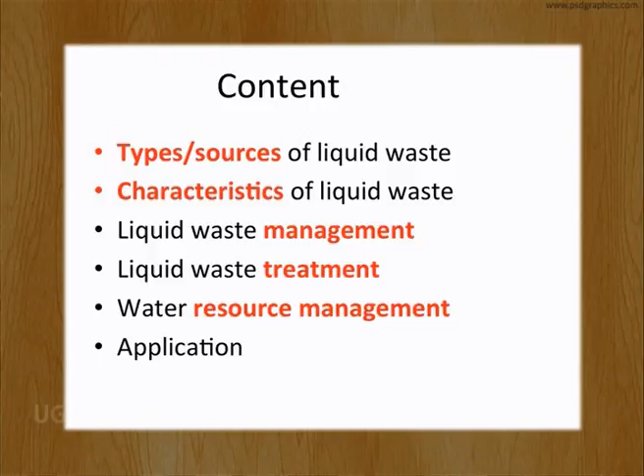Hello students, today we will discuss liquid waste management, a part of waste management, as well as the application of composting. I will talk about types and sources of liquid waste, characteristics of liquid waste management, liquid waste treatment, as well as water resource management and its application.

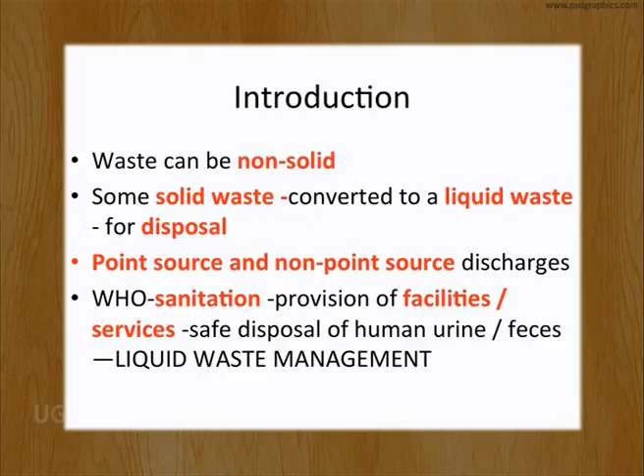Waste can be non-solid. Sometimes for disposal purposes, some solid waste can be transformed into liquid waste. The liquid waste discharge can come out from point sources as well as non-point sources. According to WHO, the World Health Organization, sanitation means provision of facilities or services for the safe disposal of human urine and feces. That is nothing but liquid waste management.

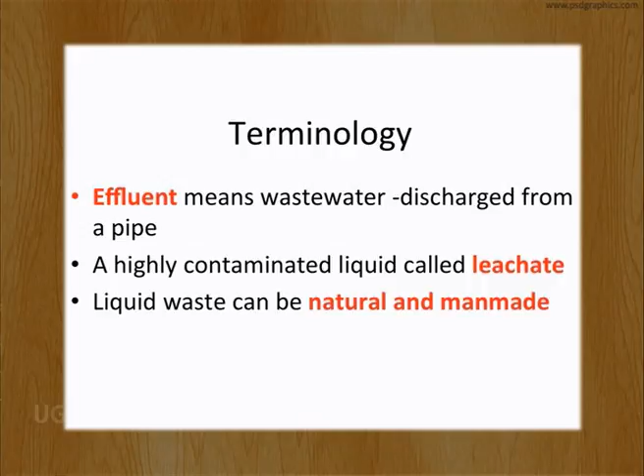Ma'am, what is point source and non-point source discharge? Point source discharge comes out from industrial effluent, and non-point source discharge comes out from agricultural runoff. The terminology 'effluent' means wastewater discharging from a pipe, and highly contaminated water is called leachate. The liquid waste can be natural or man-made.

Type, source, composition of the liquid waste. Any type of water or wastewater, if adversely affected by anthropogenic influence, is termed wastewater. Municipal wastewater is the combined sewer of storm sewer and sanitary sewer, and it is taken for treatment. After treatment, it can be discharged, and a decentralized sewer system will rely upon on-site sewage facilities.

Sewage, runoff and industrial water. Sewage can be generated from schools, institutions and households. Industrial waste can be generated from different industries. Their content and type can vary, and they may contain hazardous or toxic waste which needs special treatment.

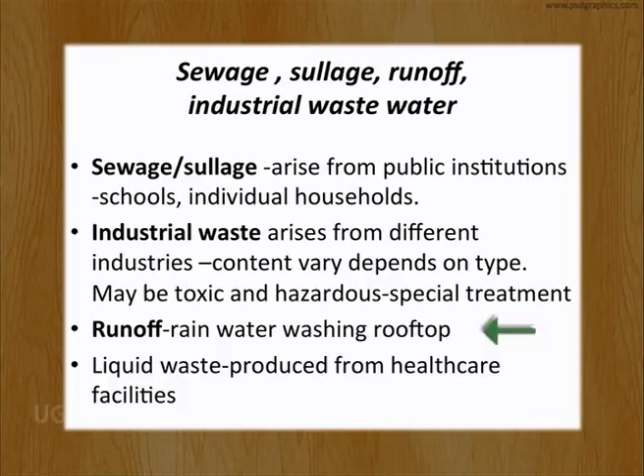Runoff can be generated from rainwater or flood. Liquid waste can also be generated from healthcare facilities. Sewage is nothing but contaminated water with human feces and urine, which is termed black water.

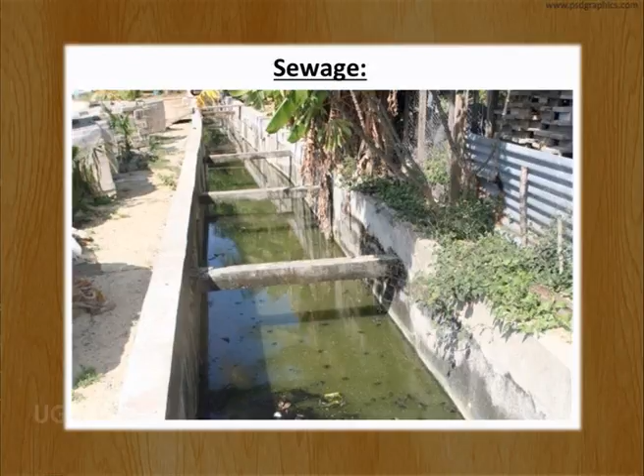This sewage includes domestic, municipal and industrial wastewater. Now, what is sewerage? It is the physical infrastructure including pipes, pumps, screens, channels, etc., which convey the sewage from households, making the sewerage network, ultimately conveying it to the treatment plants or for disposal from origin to treatment.

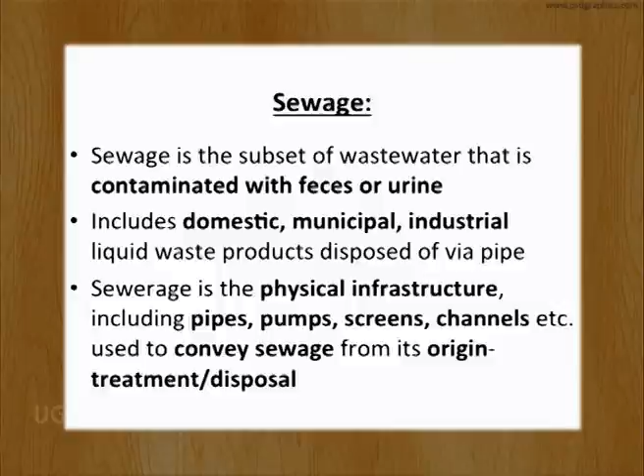Sources include human waste like urine, which is why it's called black water, septic tank discharge, discharge from the sewage treatment plant, as well as groundwater infiltration, seawater ingress, river water ingress, storm drain, highway runoff and agricultural runoff. It contains oil and natural gas, toxic contamination, extreme pH waste, as well as organic and biodegradable materials.

Composition: greater than 95% is water. It contains pathogenic bacteria, viruses, protozoa, as well as non-pathogenic bacteria. It also contains soluble and insoluble organic particles, as well as inorganic soluble and insoluble particles.

It contains gases like H2S, carbon dioxide, methane. It contains emulsion from paints as well as macrosolids. It contains toxins such as pesticides, herbicides, pharmaceuticals, hormones, as well as protozoa and other parasites.

Sullage is nothing but grey water. It is generated from personal use, so sources include the floors, clothes, as well as dishes.

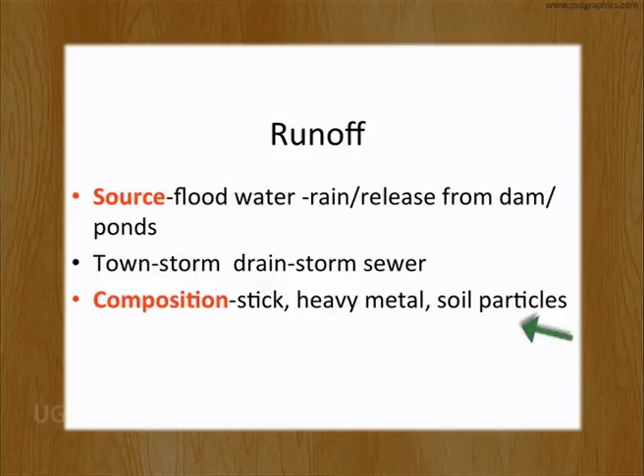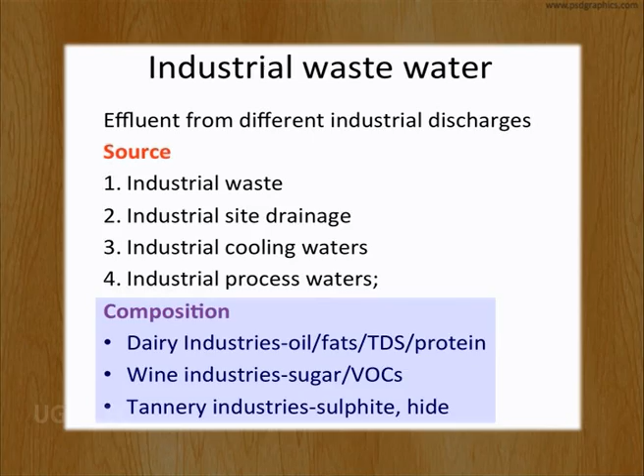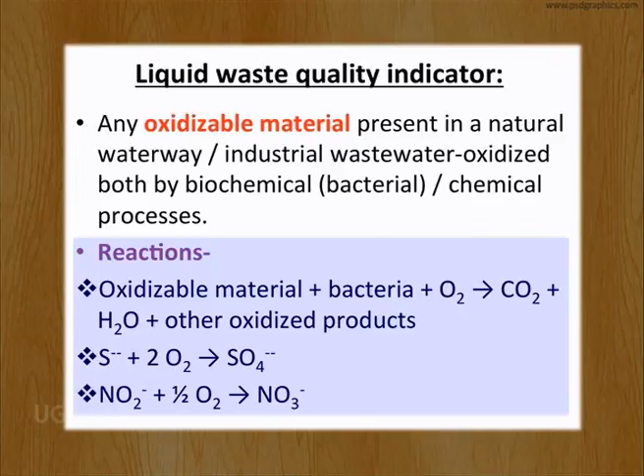Characteristics of liquid waste with respect to indicators and parameters. Liquid waste quality indicator: any oxidizable material present in water can be oxidized biochemically by bacteria as well as chemically. The reaction includes oxidizable material plus bacteria, nutrient plus oxygen, which may give rise to carbon dioxide, water, energy as well as other oxidized products. Apart from which, sulfur can be oxidized to sulfate, and nitrite can also be oxidized to nitrate.

Parameters: 5-day BOD (biological or biochemical oxygen demand), 4-hour COD (chemical oxygen demand), as well as pH, total suspended solids, ammonia, and nitrate can be taken as parameters.

Liquid waste management: I will talk about definition, significance, parameters and characterization. First, management of liquid waste is a way to dispose of the liquid waste so that it will be safe for humans and the environment.

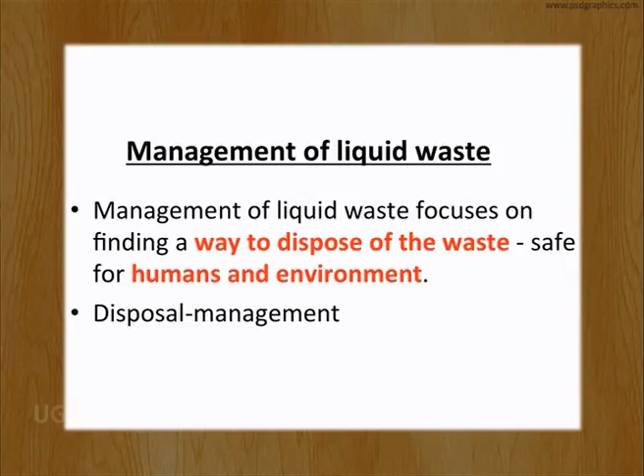So this is disposal management.

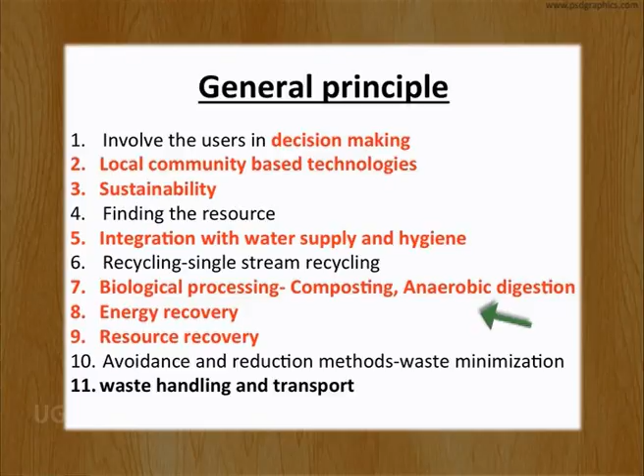General principle: there must be some principles. This involves user decision making as well as local community based technologies, sustainability, and integration of supply and hygiene. It includes energy and resource recovery, biochemical or biological techniques including aerobic and anaerobic facility, waste handling and transport, and waste minimization.

Central principle, waste hierarchy: the 3 R's - reduce, reuse and recycle - as well as the very important point of the life cycle of a product, that is manufacture and distribution of all those 3 R's. Then a very important point is resource efficiency for economic and global growth, as well as the polluter pays principle: if it creates negative impact, it must be paid by the polluter.

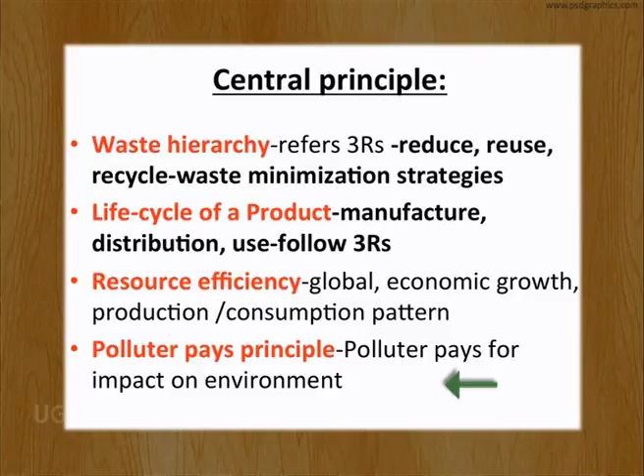Characterization of human waste management, sewage management, runoff management and industrial wastewater management.

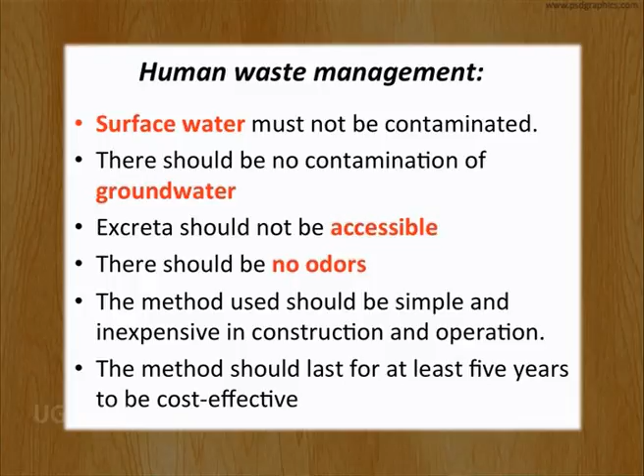First, human waste management: you have to be conscious that it must not contaminate the groundwater as well as surface water. Excreta must not be exposed or accessible, and no odor will be produced. So a particular system will be made so that construction and operation is simple, and that can last for at least 5 years, according to cost effectiveness.

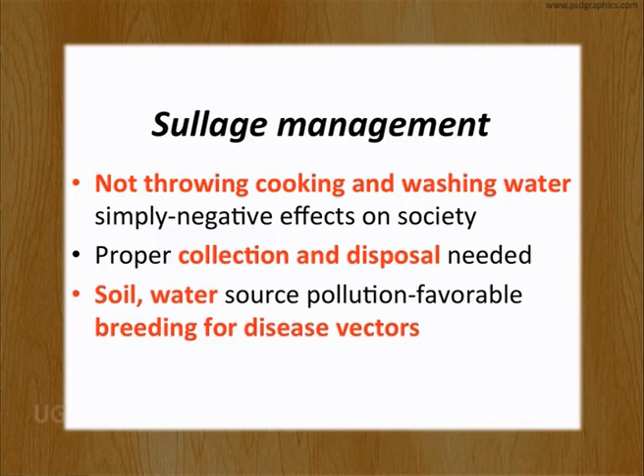Sullage management: we will not directly throw the cooking and washing water. There are many different collection and disposal techniques. Otherwise it can create soil and water contamination, as well as help breed vectors like mosquitoes, the disease vectors.

Industrial wastewater management: before release, the industrial wastewater must meet national guideline values, and for any project to run for an industry, a preliminary step must be needed according to Environment Impact Assessment, EIA. By this EIA assessment, we can predict the consequence to the environment, which may be positive or negative.

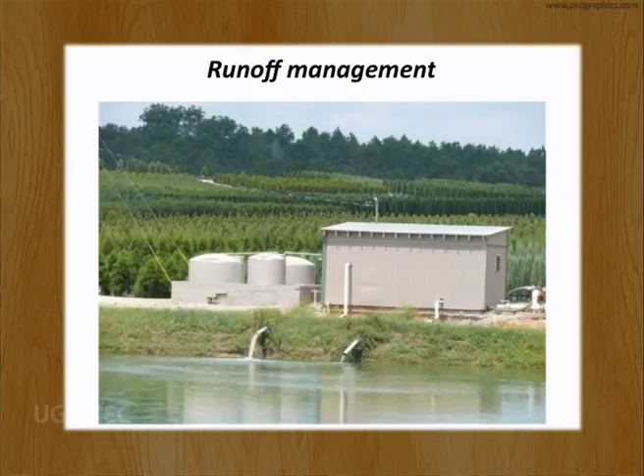Runoff management: if we cannot control the drain, storm drain etc., it can create flood, which can damage households as well as generate waterborne diseases and problems for irrigation. In towns we have storm drain canals, but in rural areas pre-planning must be needed, otherwise it can create flood, waterborne disease, and disease outbreak. So routes must be identified, with location of the routes and channelizing them.

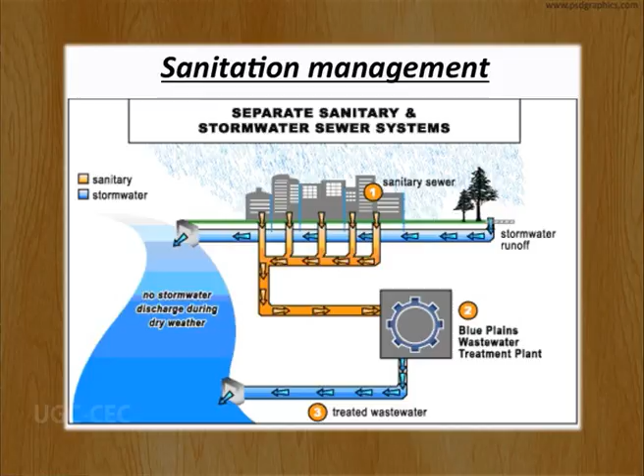Sanitation management: we have to choose proper sanitation management because there are many different techniques. Collaboration and installation of the proper sanitation system is needed.

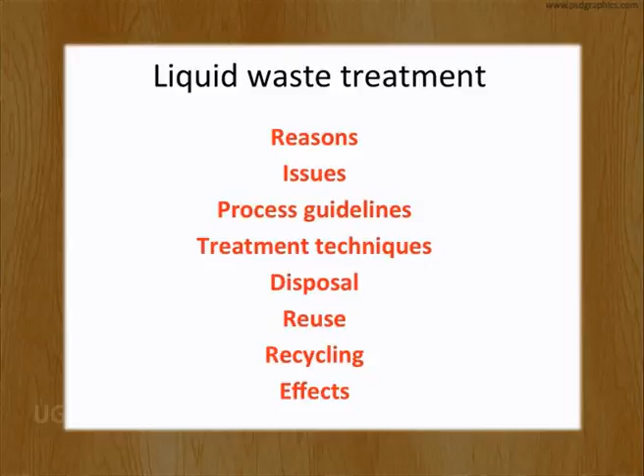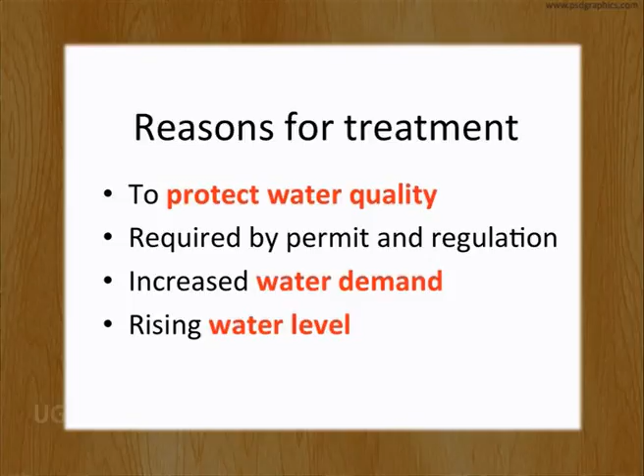Liquid waste treatment will include reasons to treat, issues, process guidelines, treatment techniques, disposal, reuse, recycling as well as effects. First, reasons: why do we need to treat them? Because to protect water quality, to rise water demand, and the increasing value of the water level. So it will need the permit and the regulation as well.

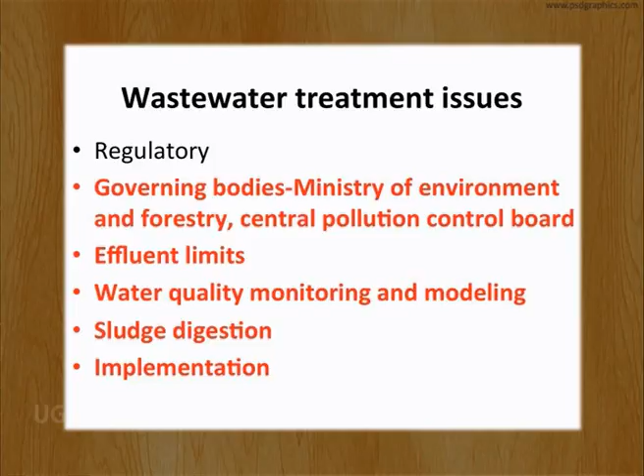Wastewater treatment issues: some regulatory governing bodies are there like Ministry of Environment and Forestry as well as Central Pollution Control Board. They will give you the water effluent limit, which will be maintained by modeling and monitoring system as well as sludge digestion implementation, which is also very much needed.

Process guideline: the treatment process and system must be simple to operate and maintain. It will be efficient and flexible as well, and may include biological, aerobic, anaerobic treatment. It will not produce any odor. After treatment, the treated sewage can be used for irrigation, and sludge can be taken as manure.

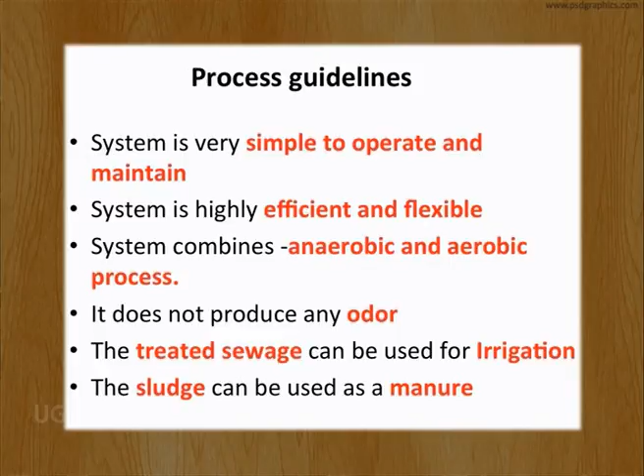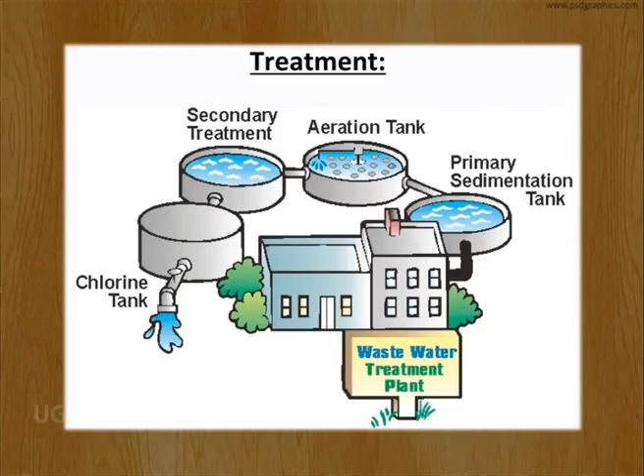Treatment: two basic approaches are there - one, to reuse the waste as a resource, as well as to resist the pollution. For industrial treatment there is the wastewater treatment plant (WWTP), as well as on-site sewage facility like septic tank (OSSF).

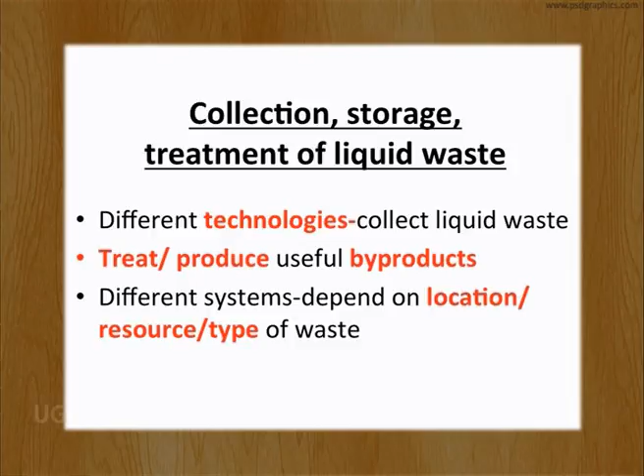First, collection, storage as well as treatment of liquid waste: there are different technologies, by which they treat and produce byproduct, which will vary according to location, resource as well as type of waste. Septic tank is actually linked to the sanitation system for partial storage and partial treatment.

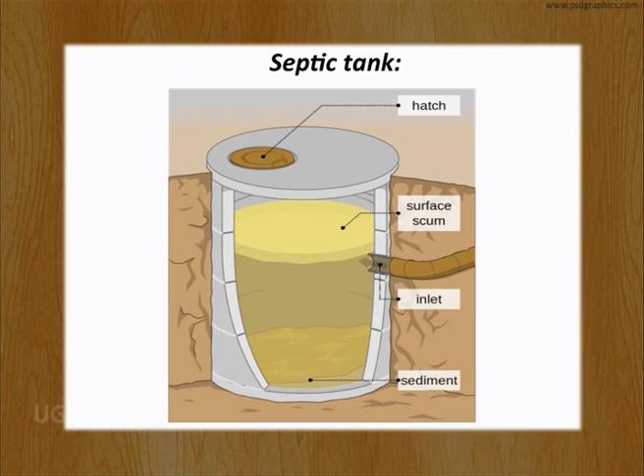Actually, we find it in case of towns as well. It is an underground system, PVC made, with inlet and outlet pipes. Retention time is 19 hours, so we can input the sanitation over there.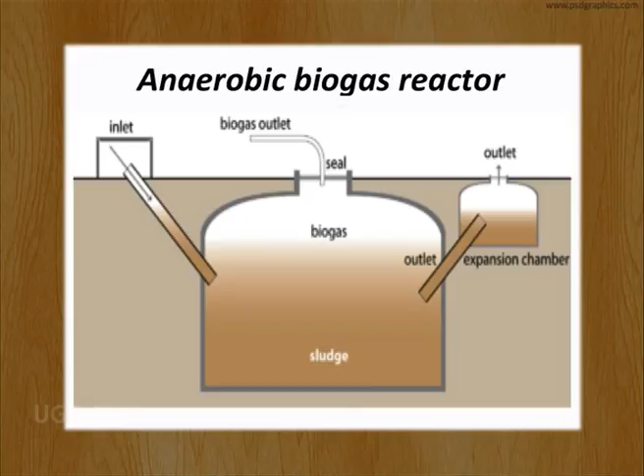It is also underground, but here we find the inlet. Human excreta is taken as input, and two outlets are there for biogas as well as sludge. Sometimes animal manure as well as vegetation can also be given as input.

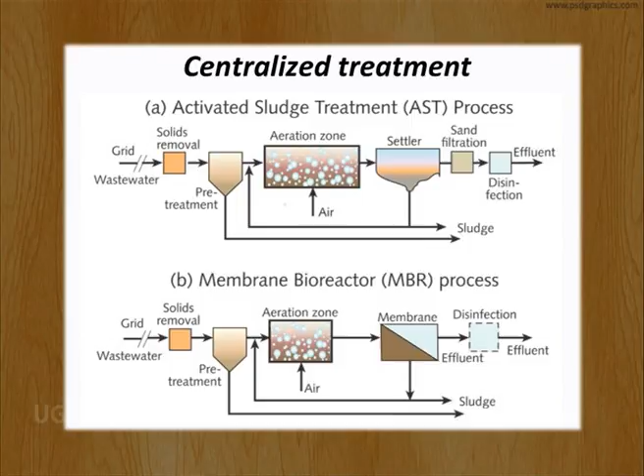Centralized treatment: in large towns and cities, the sewerage system collects the sewage and conveys it to the treatment plant. Small diameter sewers collect the sewage from different households. But in case of industrial waste, different special treatment is needed.

Pre-treatment techniques used for municipal and industrial wastewater treatment: first the preliminary physical treatment - screening, filtration as well as sedimentation. Then primary chemical treatment includes coagulation, precipitation, neutralization and oxidation.

Secondary biological treatment includes biodegradation, bioremoval, bioscrubber. Two processes are there: attached growth system and suspended growth system, either aerobic or anaerobic. Then tertiary treatment includes nitrogen removal as well as ozone treatment.

Aerobic treatment may be a natural oxidation pond or attached growth including trickling filter bed. Suspended growth includes the activated sludge process. Anaerobic treatment includes anaerobic lagoon.

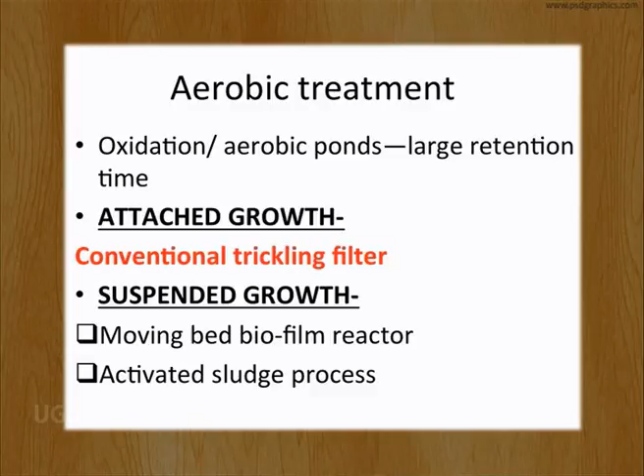Anaerobic attached growth is the anaerobic fixed film reactor. In case of suspended growth, you can follow UASB sludge blanket with granular growth, or EGSB expanded granular sludge bed system. Alternate techniques include food and beverage destruction, anaerobic treatment, temporary storage as well as deep well injection and liquid solidification.

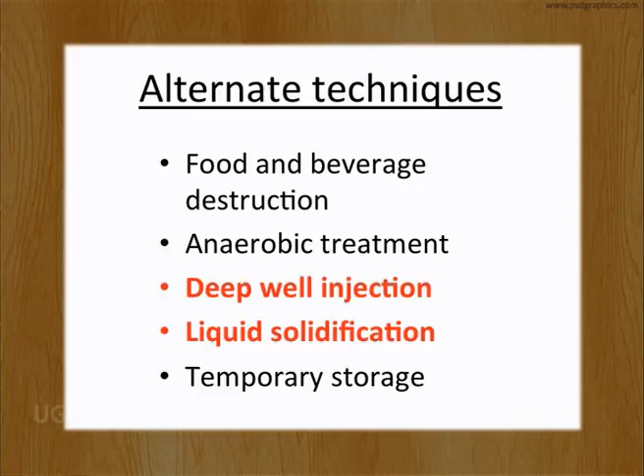Disposal: sewerage carries the sewage and storm drains carry the runoff. Ultimately they meet at the sewerage network and are disposed to the watershed.

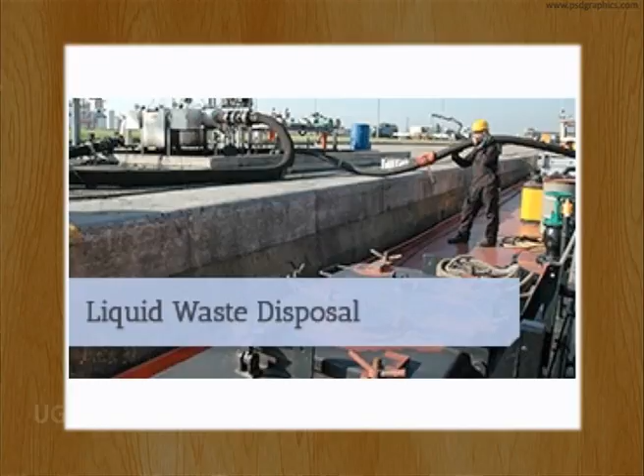There are local technologies and local regulations for local disposal, and before disposal, dilution is needed for sanitary landfill reuse. That particular water can be used for drinking purposes, for industry, for cooling towers, as well as for agriculture irrigation.

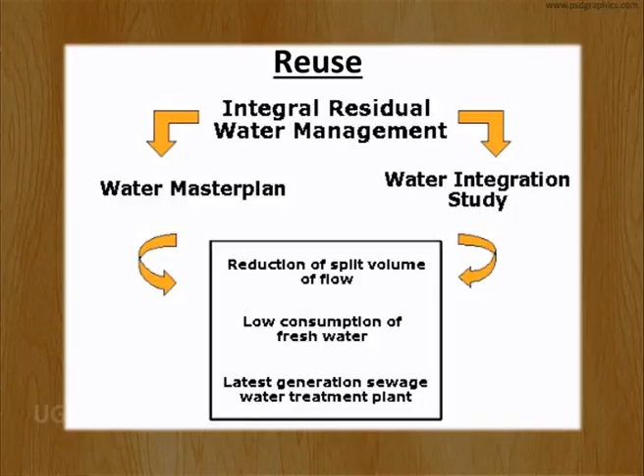Recycling: the corporate demand is going up. To meet that demand, along with reduction of demand as well as zero liquid discharge, we need recycling - separating, recovering as well as reusing by the incineration method.

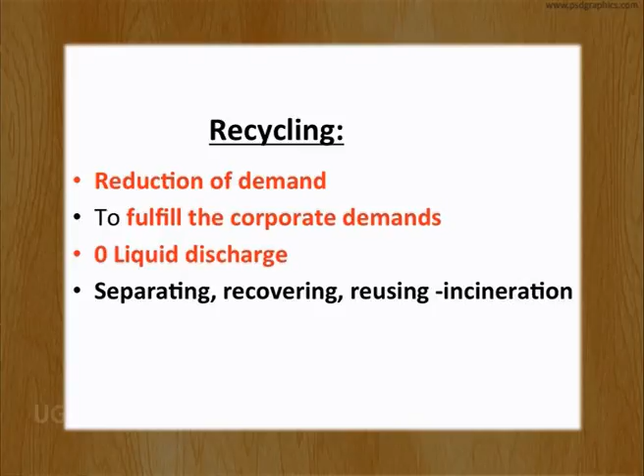Effects of treatment: if not properly treated, it can create health hazards as well as irrigation water problems, because it will contain so many chemical and biological pollutants. There is an institute called the International Water Management Institute that assesses and reduces the risk of waterborne disease and water for irrigation.

Water resource management - what is water resource? Significance, conservation and water cycle. Water resource management is the activity of planning, developing, distributing and managing the optimum use of water. It includes water cycle management as well as planning of use and demand. A balance must be there.

Water resources include maximum use in agriculture as well as managing water for the urban setting and future water resources. Significance must include techno-financial feasibility and sustainability. The strategy includes rainwater harvesting, which is very important, as well as proper maintenance. People's participation is needed, and for raw water treatment many different technologies and treatment techniques have evolved.

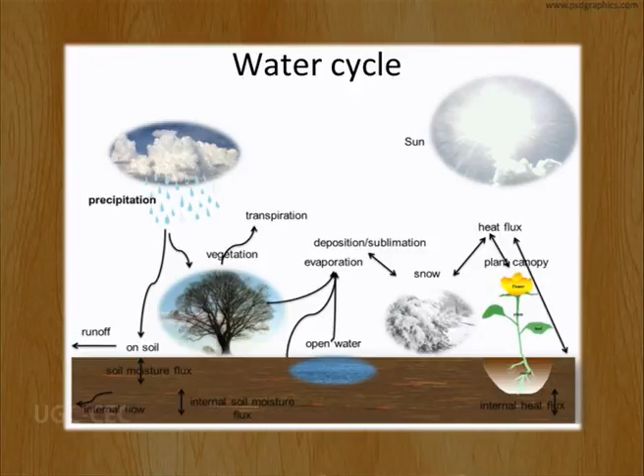Water cycle, also called the hydrological cycle, is the continuous movement of water on, above or below the surface of the earth. Water can move from one reservoir to another, like from river to ocean, following physical processes like evaporation, condensation, runoff, as well as precipitation, infiltration, and snow melting.

Application: here you can learn that some solid can be transformed to liquid for disposal, but sometimes liquid can also be transformed. The particulate matter can be concentrated as activated sludge by the activated sludge method, so they become solid waste. That solid waste can be digested either by incineration or composting.

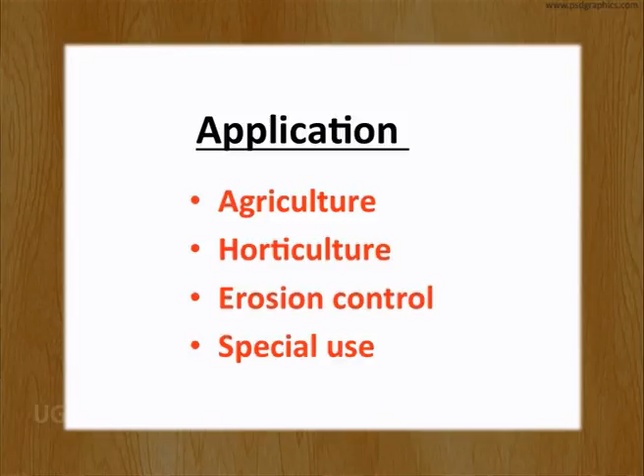They have several uses - in agriculture like potato and tomato, in some cases for irrigation purposes, and for other purposes that particular sludge can be used as fertilizer. They are used for horticulture, and they have use in erosion control as well as some other special cases of application.

So students, I have described wastewater management techniques as well as water resource management techniques. Thank you.